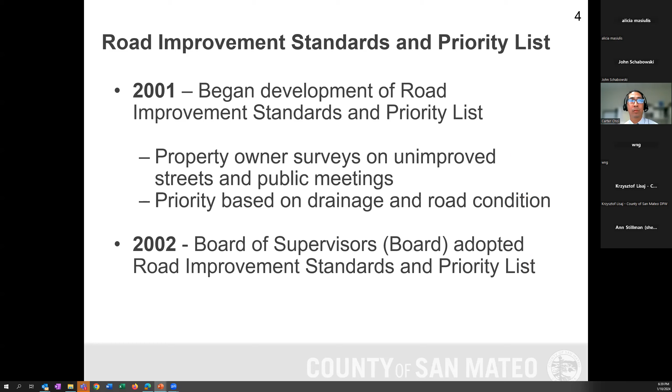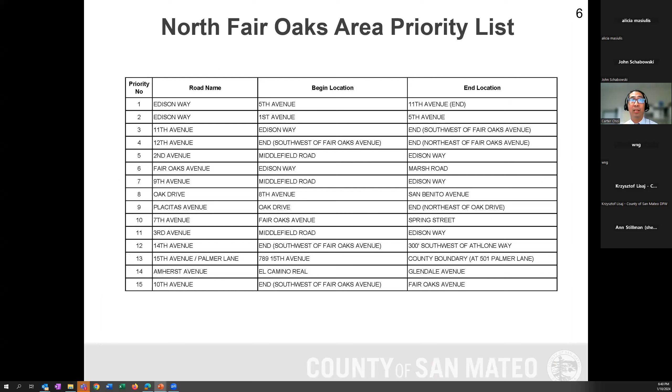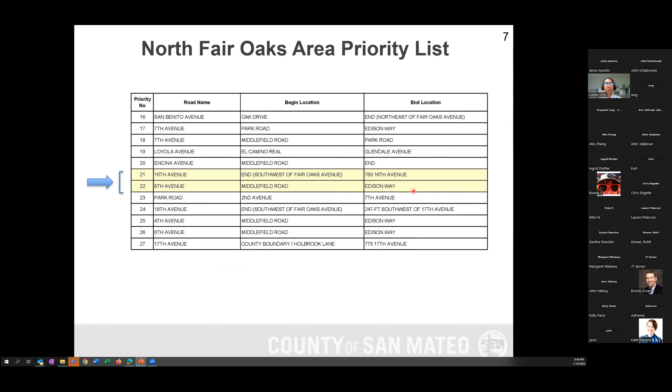The department has made a lot of progress on these roads in the North Fair Oaks area. We are currently on priority number 21 and 22. This project will reconstruct 16th Avenue from Fair Oaks Avenue to about 789 16th Avenue. The project limits for 8th Avenue are from Middlefield Road to Edison Way. After these two roads, we will have 5 remaining roads on the North Fair Oaks priority list to do.

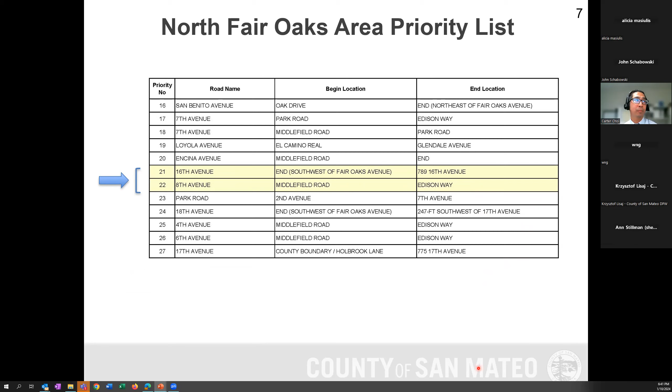This map is a color-coded version of our priority list, showing the existing roads completed to date, shown in blue. The roads that voted for no improvements are shown in yellow, and the remaining roads to be surveyed are shown in green. The area of the proposed road improvements, like 16th and 8th, are shown in black.

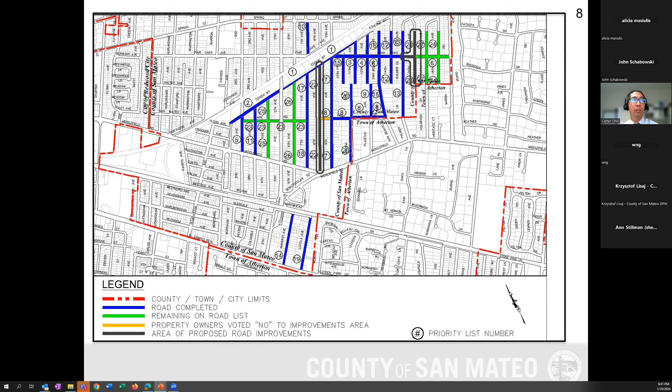We will now discuss the road standards and options for 16th and 8th Avenue. The project includes 5 options that property owners will vote on: Option 1, maintain as is. Option 2, repair and resurface the existing pavement. Option 3, reconstruct the road with 18 feet of pavement with 6-inch wide concrete bands. Option 4, reconstruct the road with 18 feet of pavement with 2-foot wide valley gutters. Option 5, reconstruct the road with 18 feet of pavement with 3-foot wide valley gutters.

Based on the county board's policy, the improvements will be centered in the road right-of-way unless the road must be moved to avoid trees or major encroachments within the right-of-way. I will provide more detail later in the presentation about these 5 options.

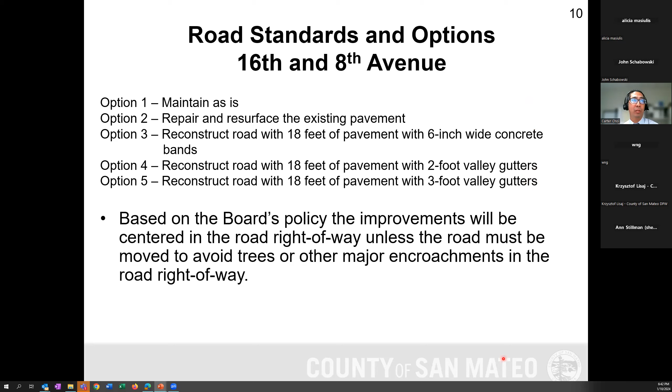This slide shows where the 5 options have currently been constructed. Options 1 through 5 are listed and identified by their respective colors. The majority of the North Fair Oaks community have chosen to go with options 3, 4, and 5.

These options reconstruct the road with 18 feet of pavement, with either a 6-inch wide concrete band, a 2-foot wide valley gutter, or 3-foot wide valley gutters. This presentation will be posted to our project website for you to use as reference.

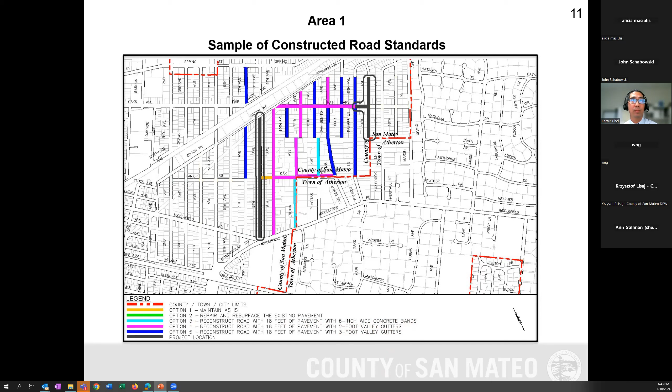Starting with 16th Avenue, we have option 1, which is maintain the road as is. If this option is selected, there will be no work occurring on your street. It will remain as is.

Option 2, repair and resurface the existing pavement. If this option is selected, pavement repairs will be performed and an overlay treatment will be constructed.

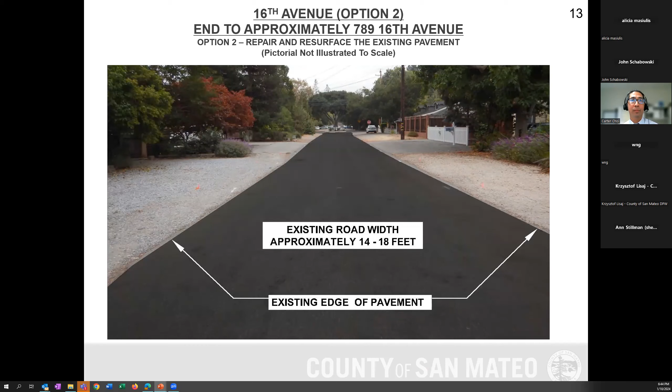Option 3, reconstruct road with 18 feet of pavement with 6-inch wide concrete bands on the sides. To get an idea of what this looks like, locate the field survey markings, which are either spray paint or the red whiskers on the sides. Locate the inside spray paint marking, measure outward away from the roadway 6 inches, and that should be your outer edge of the concrete band.

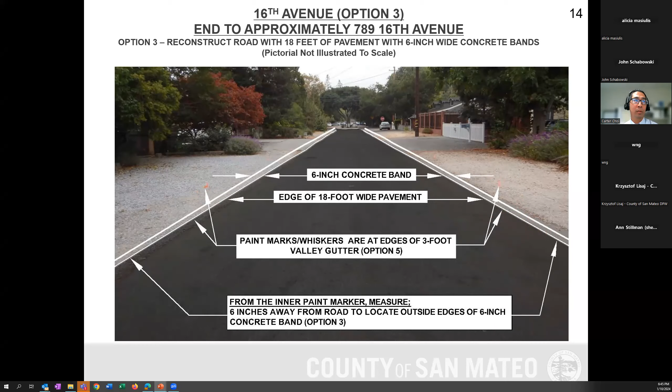Options 4 and 5 for 16th Avenue both include construction of an 18-foot wide pavement. Option 4 will install 2-foot wide valley gutters. To locate this, find the field survey markings, locate the inner spray paint marking, and measure 2 feet out from the roadway — that will be option 4, the 2-foot wide valley gutter.

Option 5 will be the 3-foot wide valley gutters with 18 feet of pavement. The outside edge of the 3-foot wide valley gutters is shown at the outer spray limits, or in certain cases, the red whisker markings in the road. That will be the outer edge of the 3-foot wide valley gutters.

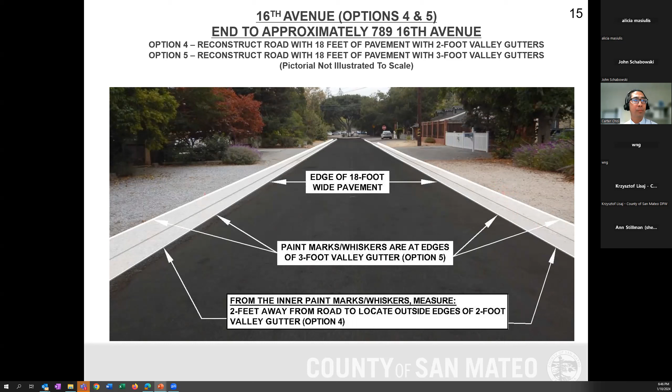Next slide, 8th Avenue, option 1. This would be very similar to 16th Avenue. For option 1, maintain as is — if selected, there will be no work occurring on your street, and the road will remain as is in its current condition.

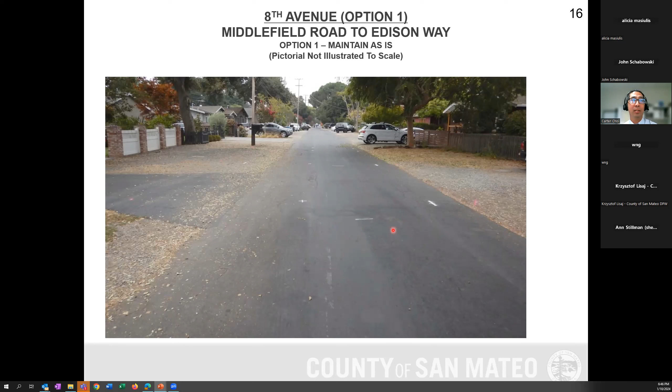Option 2 for 8th Avenue, repair and resurface the existing pavement. If this option is selected, pavement repairs will be performed and an overlay treatment constructed.

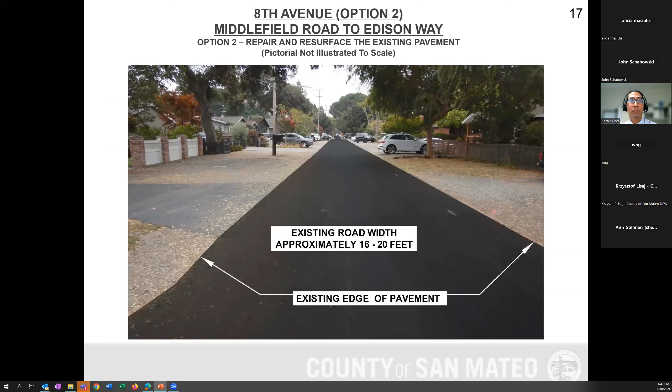Option 3, reconstruct road with 18 feet of pavement with 6-inch wide concrete bands — same as 16th Avenue. To visualize this in the street areas, first locate the field survey markings, find the inside spray paint marking, and measure out away from the roadway 6 inches, which will be the outer edge of your concrete band.

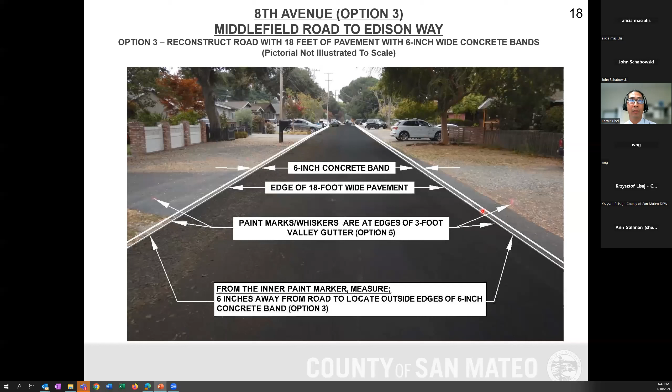For options 4 and 5 on 8th Avenue, it will be reconstruct with 18 feet of pavement. Option 4 will be a 2-foot wide valley gutter. Similarly, find the field survey markings, locate the inner spray paint markings, measure 2 feet out from the roadway, and that's option 4.

Option 5 will be the 3-foot wide valley gutters, which are identified with the red whiskers, or in some cases the spray paint markings. That will be the width of your 18 feet with 3-foot valley gutters.

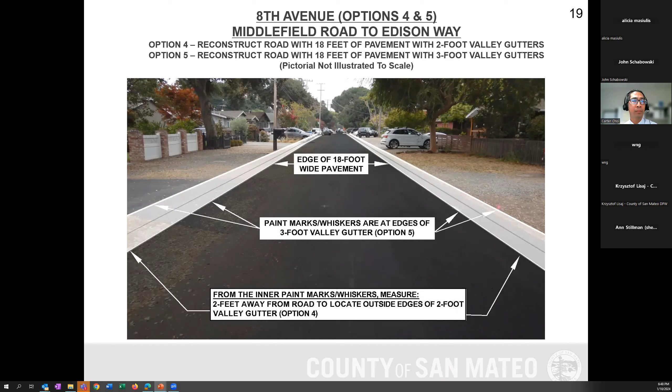This survey was sent out only to homes located within the unincorporated area of San Mateo County, and only to property owners on 16th and 8th Avenue. Each vote is based on front footage of each parcel, obtained from the county's assessor parcel maps. If a survey is not received from a property owner, it will be considered a maintain-as-is vote, meaning option 1, if not received by the county.

If none of the options receives at least a 50% vote, the default option will go to option 3, a 6-inch concrete band.

I really stress the importance of speaking with your neighbors, reminding them to submit the property owner survey, which is due by Friday, January 26th. Please help spread the word — speak to your neighbors about these 5 options and submit your surveys by Friday, January 26th.

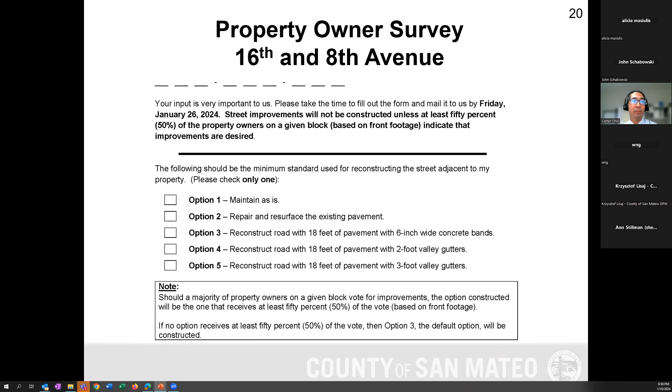The next slide will identify some design issues and considerations for the project. These impacts are to existing landscaping, shoulder area, trees, mailboxes, and drainage boxes.

Another issue is relocation of existing encroachments, and in some cases we'll ask that these be relocated by the respective utility agency or by the homeowners. The last design issue is roadway drainage, which I will cover in a bit in the next few slides.

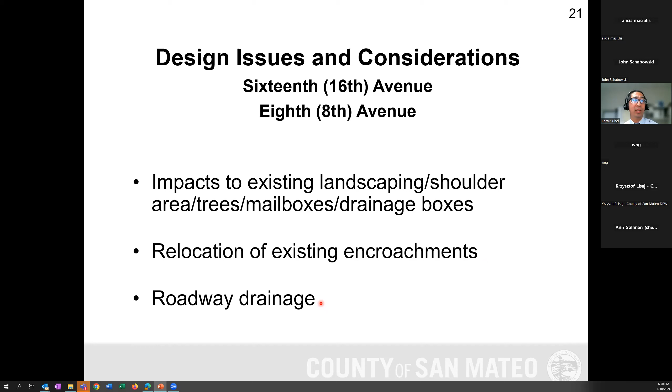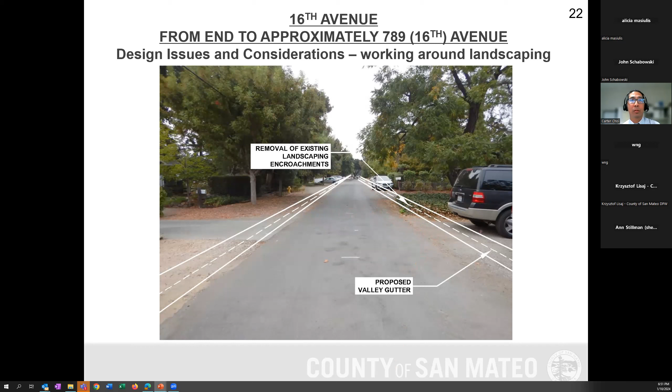Similar situation here in this photo, at 16th Avenue, approximately 789 16th. Here the landscape feature will need to be removed in order for the county to install a concrete valley gutter.

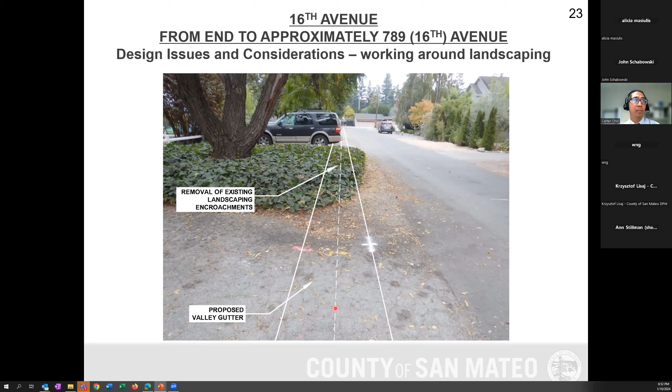The next slide shows a similar example, this one on 8th Avenue. Here are some landscape encroachments where we would work with the homeowner to resolve, including vegetation, hedges, and some wood blocks installed where the proposed valley gutter will be constructed.

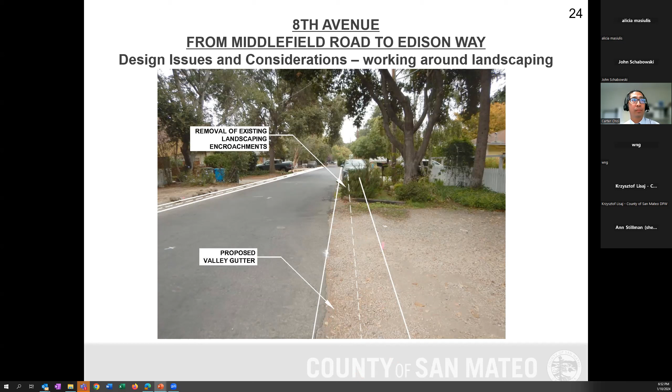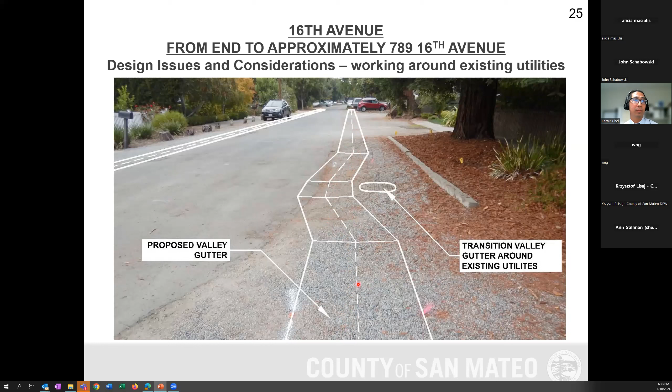For those wondering how the valley gutters will tie into the existing curb and gutter at approximately 789 16th Avenue, this photo shows the concrete transition of the valley gutter as it approaches the existing curb and gutter on either side of the street. The concrete valley gutters will tie into existing sidewalks.

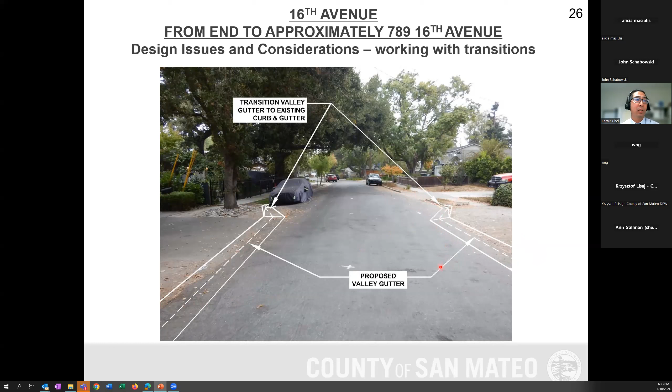In addition, we will also be looking to add green infrastructure, such as rock swale or French drain or other bioretention measures within the project. By installing green infrastructure, it may limit parking restrictions at certain locations.

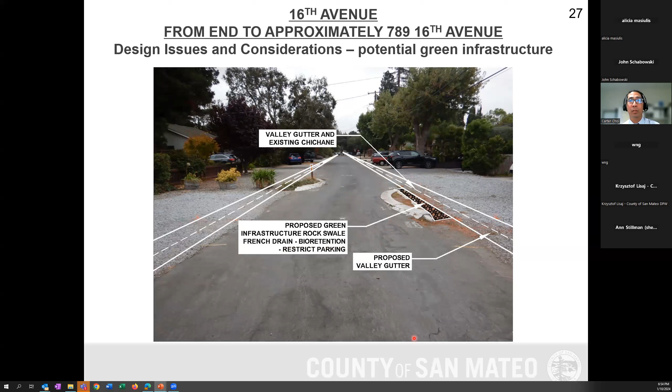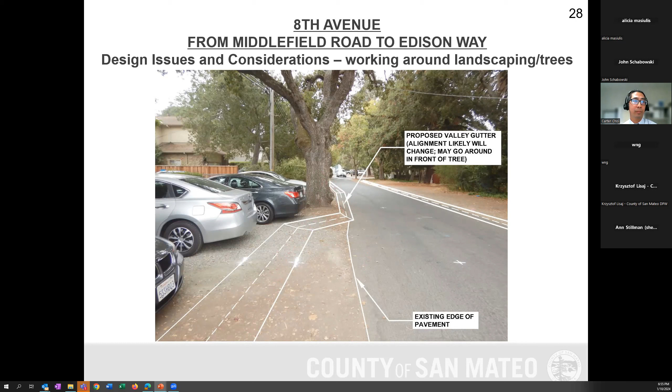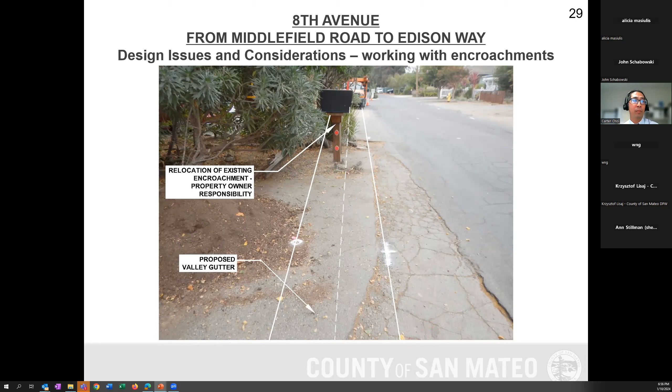So how do the existing conditions tie into the 5 options? Options 1 and 2 allow the existing drainage patterns to remain. Option 3, the 6-inch concrete band, generally allows existing drainage patterns to exist, including infiltration into permeable shoulders. Options 4 and 5 with concrete valley gutters will help facilitate the flow of water more efficiently, essentially flowing from the beginning of the block to the other end with the installation of concrete valley gutters.

For options 3 through 5, the design would need to include evaluation of subsurface storage and infiltration facilities. We have used these on other roads in the North Fair Oaks area, including Encina, Oak Drive, Placitas Avenue, and San Benito Avenue. This evaluation must be very site-specific, and we can only use these where there are no conflicts with existing underground facilities—basically, the area under the ground should not have any conduits or obstructions where we could install these.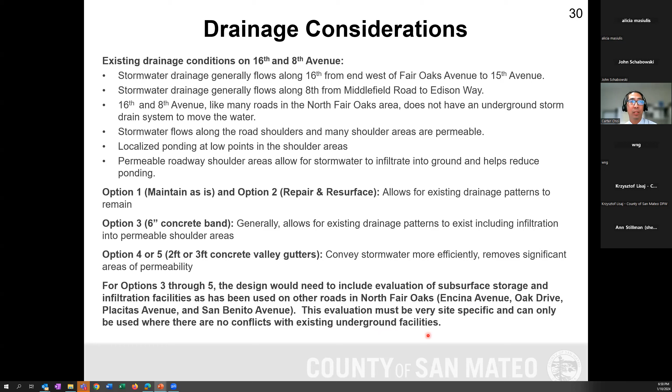Our preference is to install underground systems. However, that may not always be the case based on underground utility conflicts. All these systems are intended to treat small storms and should not be expected to fix all major drainage within the area. However, installing one or more of these systems will help convey the water to an area where

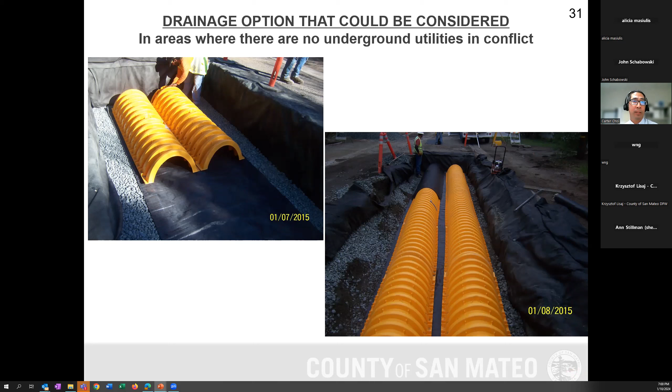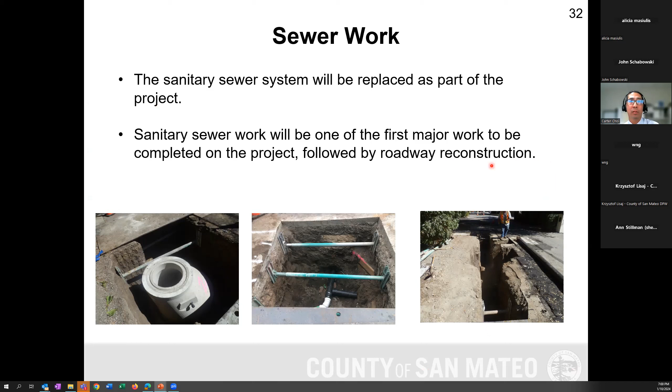As part of the project, the sanitary sewer system will be replaced, and this will be one of the first major work items on this project. After the sewer system is replaced, we will work on the roadway itself.

The project funding for this work is somewhat limited in what it can pay for. The county is using a combination of SB1 and roadway mitigation funds for this work, and these funds can only pay for roadway reconstruction, valley gutters, and minor concrete work. Unfortunately, we cannot use these funds for landscaping, shoulder, and driveway work beyond the required project limits.

So if you are planning to have your sewer lateral replaced, I highly suggest this is done as soon as possible, before the project is constructed. The Fair Oaks Sewer Maintenance District is the district for this area, and per policy, it is the property owner's responsibility to maintain and repair the sanitary sewer lateral from the house to the sewer main.

If this project is constructed, there will be a 2-year moratorium in place, and no utility work will be approved unless it is considered an emergency.

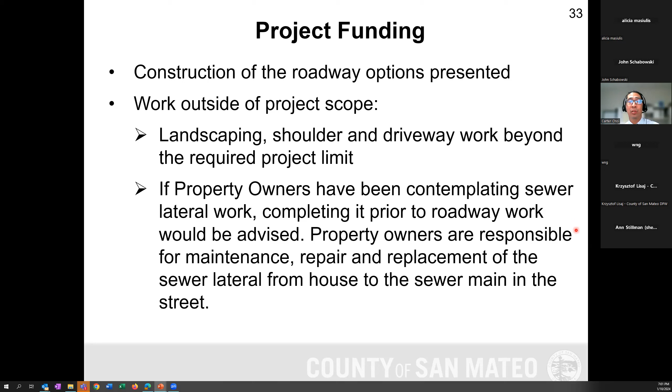We have identified several stakeholders on this project, including utilities like Cal Water, PG&E, and the Fair Oaks Sewer Maintenance District. The county certainly prefers major utility work to be completed in advance of our project so that we can get the best outcome for the roadway.

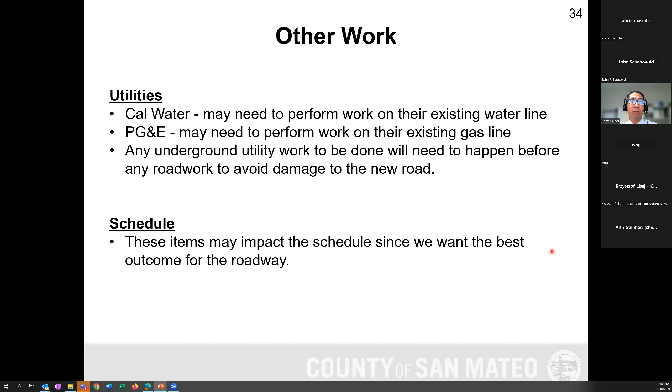We will be proactive in working with these stakeholders during the design of this project, and we plan to coordinate work with these utilities in advance of our projects.

Now, on to the proposed process and timeline. We are currently working on the property owners' feedback through surveys. Again, they are due by January 26th, so please talk to your neighbors and submit them by Friday, January 26th. In early February, we will review these survey results and determine if there is a project standard to be used.

We will then work on the design with the goal of completing it by spring of 2024. Once the design is completed, we will advertise and bid the project in early summer, with construction starting in summer/fall of this year.

I would like to add that the schedule can be impacted by several items, including coordination with stakeholders or impacts due to weather. Depending on this winter and the storms we get, the county may have to prioritize certain emergency projects as a result of the storms, and that could impact the project.

I'd like to suggest that we check the project website for the most current timeline for this project, because that will be the best source for information in terms of project timeline and where we are at.